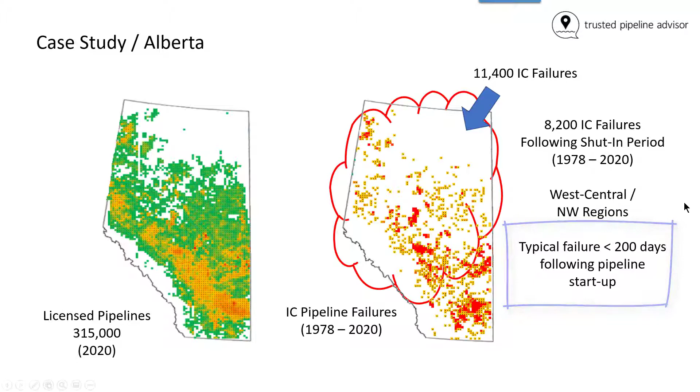Well production patterns from upstream wells in the West Central and Northwest regions highlight the relationship between pipeline reactivations following a shut-in period. The corrosion failures are consistently isolated pitting corrosion damage along the bottom of the pipeline. In contrast, bottom-of-the-line general corrosion is observed in the eastern and southwestern regions of Alberta with no strong relationship to on-off production cycles. The corrosion damage and corrosion rates in these regions are consistent with expected corrosion attributed to normally produced oil, gas, and water fluids.

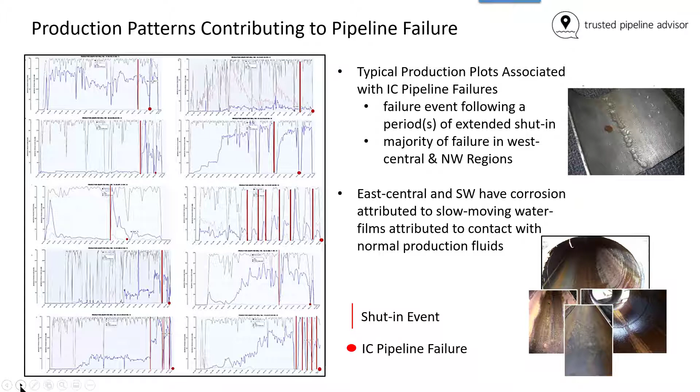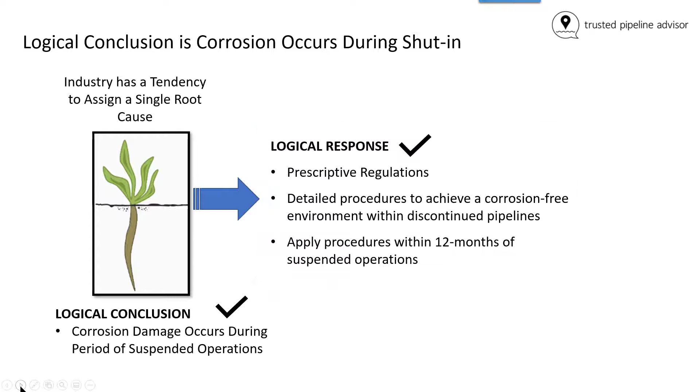Our industry has a tendency to assign a single root cause failure factor to pipeline failures. In this case, it is logical to conclude that corrosion damage occurs during the period of suspended pipeline operation in central and northwest regions. In response, regulations have been put in place for 25 years that demand action be taken within 12 months of suspended operations to render the pipeline environment non-corrosive. Of course, there are many contradictions to this conclusion and response.

First, internal corrosion continues to be the #1 cause of failures within the West Central and Northwest production regions, even though there is strong compliance to the regulations. Pipelines continue to fail within 200 days following reactivation. Second, corrosion rates should diminish in shut-in pipelines compared to an operating pipeline, as the corrosive environment is no longer sustained by a supply of produced fluids.

It is certainly a surprise that the environment within a non-operating pipeline is capable of creating high corrosion rate pitting corrosion damage, often full of debris, when this type of corrosion was not present prior to the pipeline being shut in. Finally, the corrosion rates experienced upon reactivation of the pipelines are often 50 times greater than the corrosion rate experienced prior to the shut-in event.

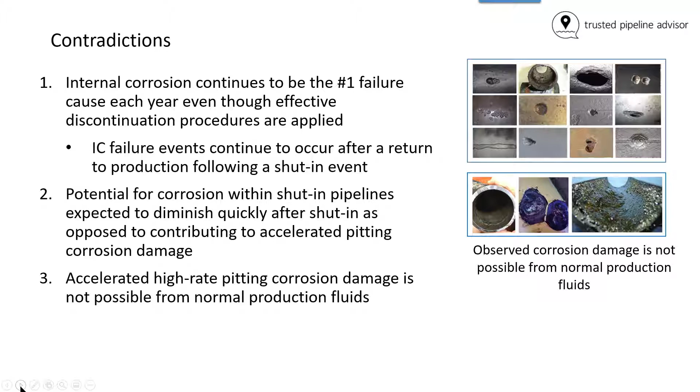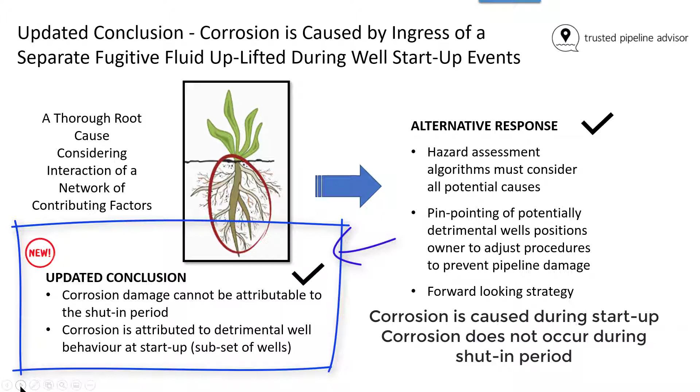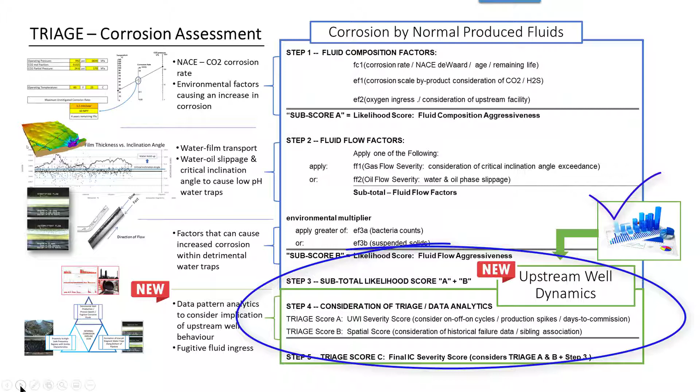When a more rigorous investigation is conducted on these pipeline failures, an investigation that considers a network of possible contributing factors that interact to cause the corrosion damage, the conclusion changes. The updated conclusion is that the 8,200 historical failures in these problematic regions actually occur at the startup of the upstream well or wells and not during the shut-in period. Our response to this new conclusion has been to use data pattern analytical methods and machine learning since 2010 to create algorithms that consider the implication of upstream well dynamics and the uplift of fugitive corrosive materials into our pipelines.

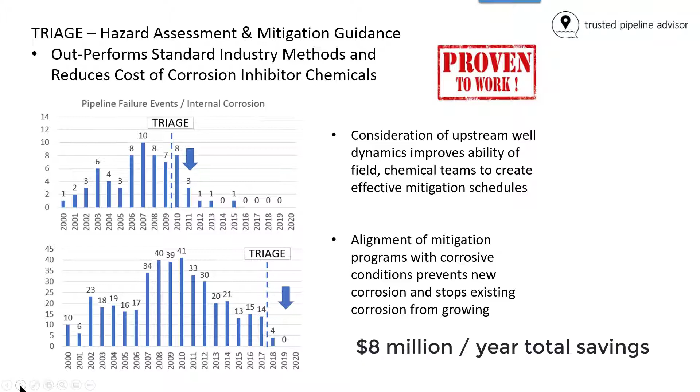Properly aligning mitigation to pipeline condition prevents new corrosion from beginning and stops existing corrosion damage from growing to failure. In these two cases, the companies operate a total of approximately 8,000 pipelines. Alignment of mitigation to actual pipeline conditions not only eliminated internal corrosion pipeline failures, but also contributed to a combined savings in direct chemical costs of over $8 million per year.

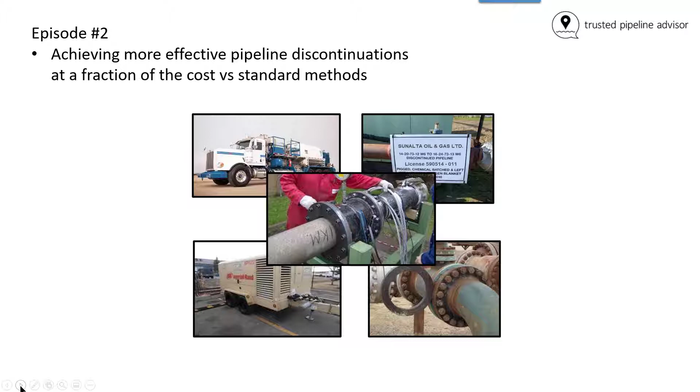We will continue to examine the industry focus on discontinued pipelines in Episode 2 by showcasing a proven method that more simply addresses the corrosion risk during suspended operations at a substantially reduced cost compared to standard industry methods.